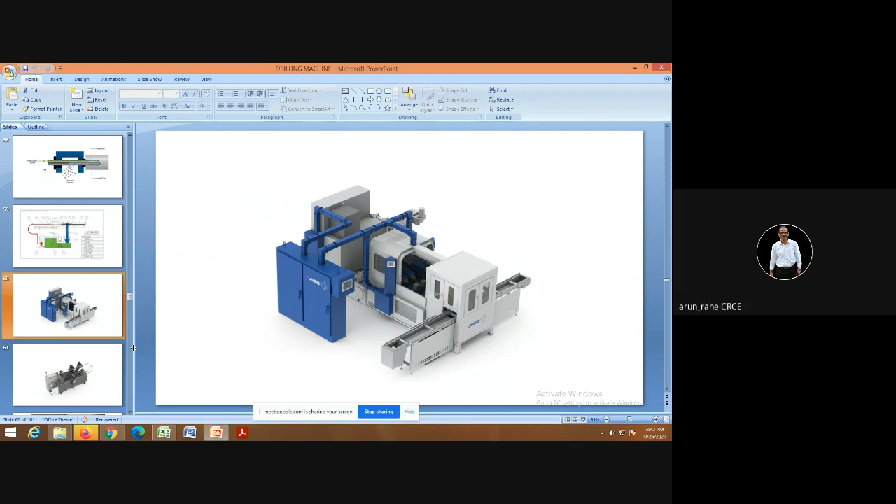So these are the photographs of the deep hole drilling machines. This is how the deep hole drill will look like, which we discussed last time.

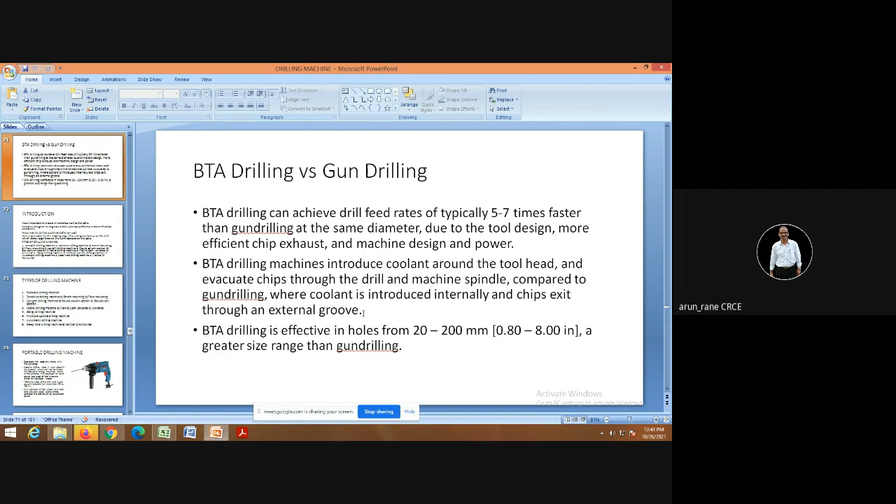BTA is again a deep hole drilling process. There is a difference between BTA drilling and gun drilling. BTA drilling is faster, and BTA drilling has coolant around the tool head. It is effective in holes 20 to 200 millimeters and so on.

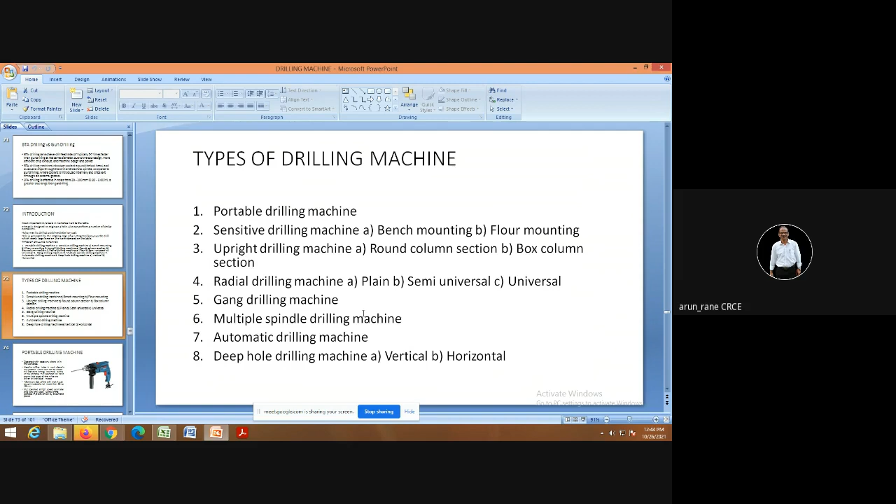So we had stopped here last time. These are the types of the drilling machines: portable drilling machine, sensitive drilling machine, upright drilling machine, etc. Now we'll discuss one by one.

This is the portable drilling machine, which you are already familiar with. Portable drilling machine means it can be carried from one place to other place easily.

So the main concern about this is that it has to be lightweight. The weight should be light because the operator or worker will be using this the whole day, so it should not be laborious.

Now portable drilling machines can be wired, that is it can have electrical supply, or it can be battery operated. Mostly portable drilling machines are battery operated so that it can be carried anywhere and drilling can be done.

Battery operated ones have the limitation that recharging of the battery - once you charge it, it will work for around 3 to 4 hours, so after that you again need to recharge it. Another disadvantage of the portable drilling machine is that it has limitation on drilling - it cannot accommodate more than 12 mm. So basically it is used for smaller holes or smaller sizes.

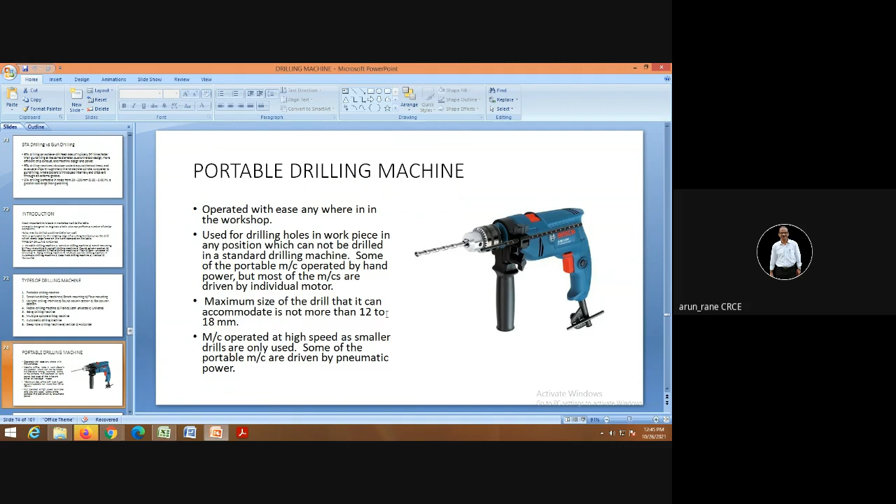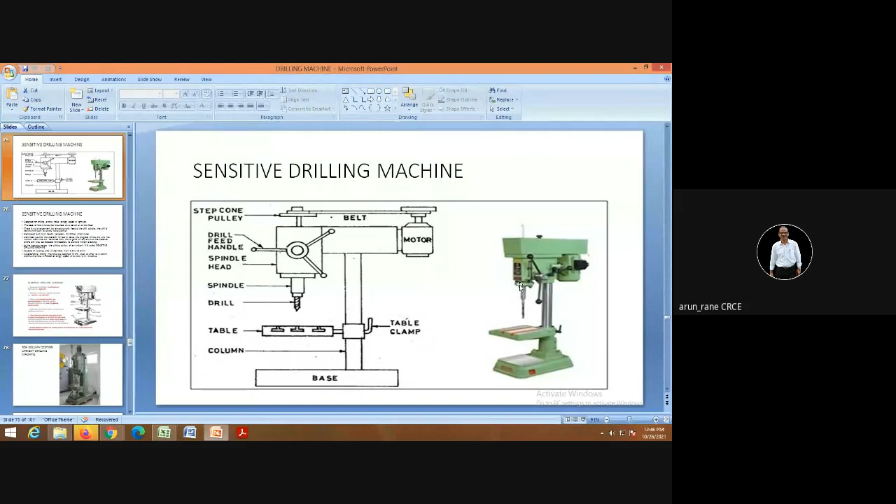This is the sensitive drilling machine. This is an accurate machine, and generally the sensitive drilling machine doesn't have auto feed, so the drilling is done manually.

The features of the sensitive drilling machine are that it can be used for drilling small holes, in lighter jobs, and at higher speeds. So it can drill holes from 1.5 to 15.5 mm. It can even be used for drilling small holes of size 0.35, 0.5 comfortably.

This is how the sensitive drilling machine will look like, and as you can see, it is used for lighter jobs because the weight of the workpiece will be carried on this table, and this table is locked. If the components or workpiece are heavy, then you can loosen this table clamp, take the table away, and the workpiece can be mounted directly on this base. So heavier components can also be accommodated.

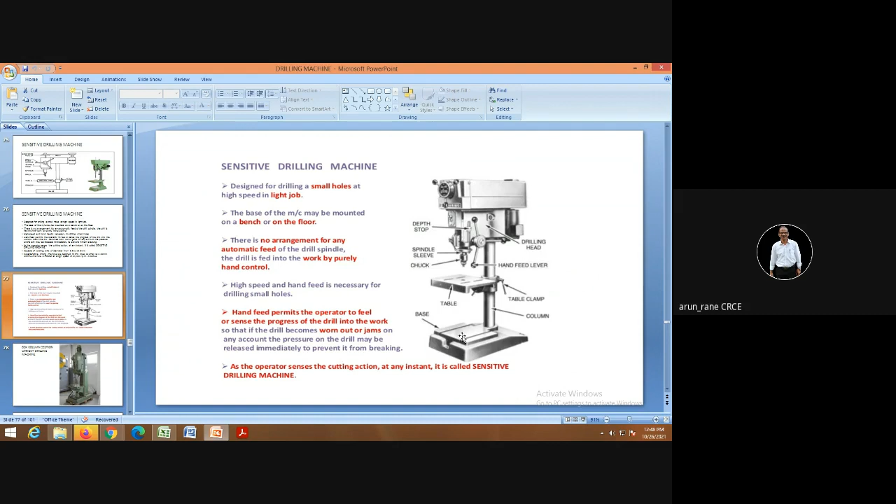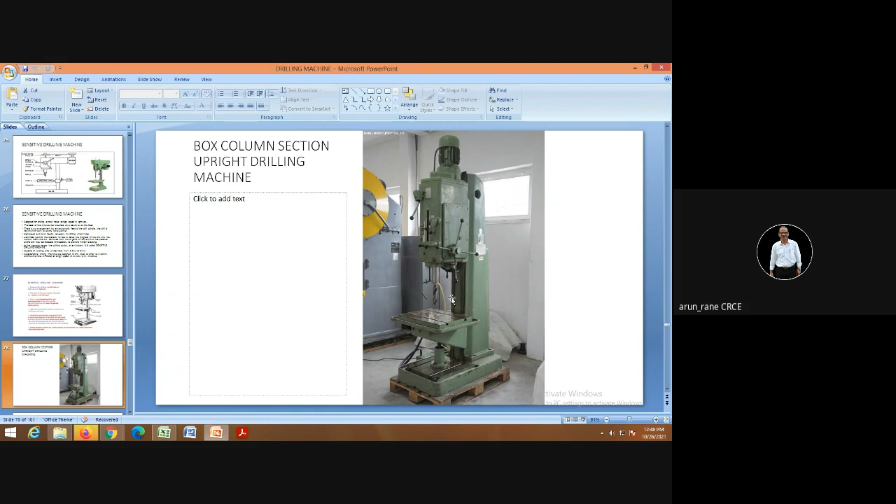This is your box column section, upright drilling machine. The column is like a box - that's why it is called the box column section upright drilling machine. It can be used for drilling up to 2 inch capacity. When I say 2 inch, that means you can drill directly 2 inches in steel, that is in MS. A direct first drill of 2 inch size can be used.

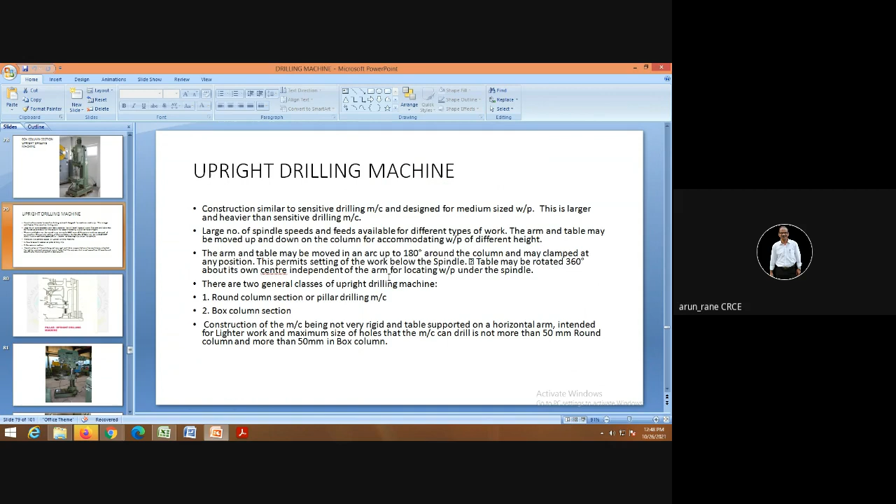And why is it called upright? Because the column is vertical - that's why it is called the upright drilling machine. So the capacity of the upright drilling machine is up to 50 mm. Again, the component or workpiece can be mounted on this table, or on this base.

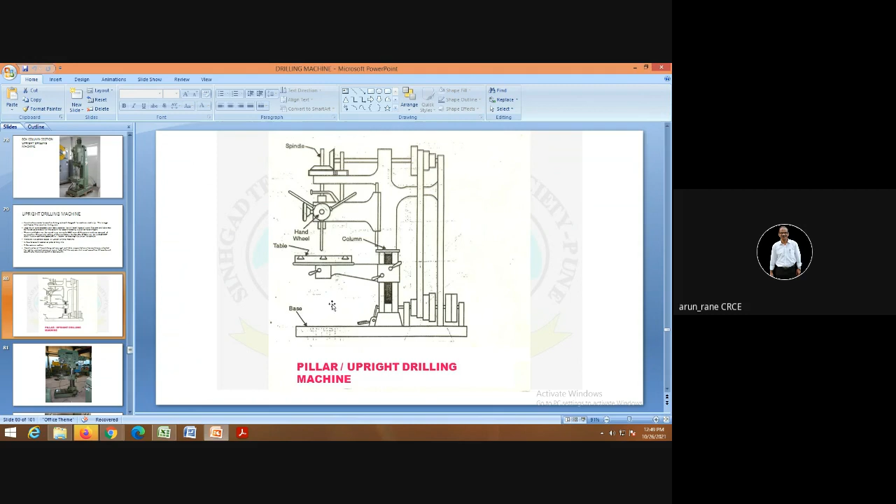This is another photograph of an upright drilling machine. This looks like your column type drilling machine. Again, if the components or workpiece are heavy, they can be directly mounted on this base.

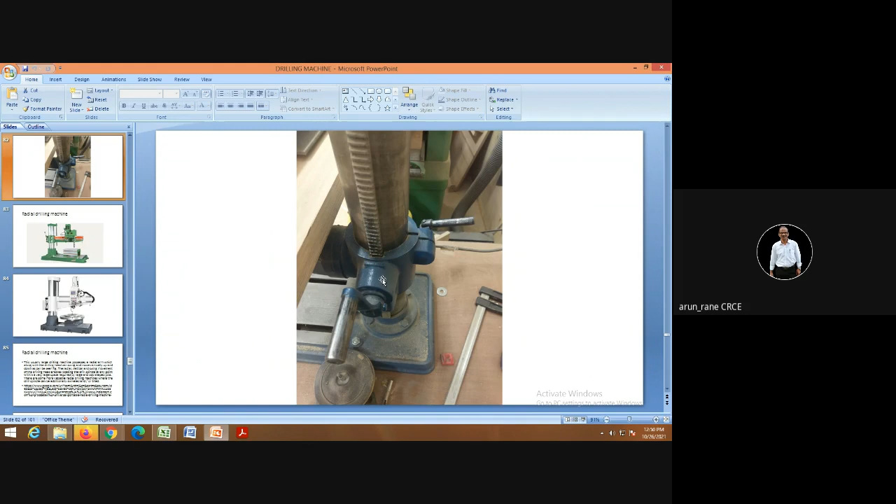This is a lifting arrangement, that is a rack and pinion arrangement. This is called the rack, which is mounted on the column, and the pinion is mounted on this hand wheel. So once you rotate this hand wheel, the pinion will rotate, and the table will move up and down on this rack.

This is a photograph of a radial drilling machine. As I told earlier, radial drilling machines can be used for up to 3 inch drilling directly in mild steel. This is a radial arm, and this is a column on which the radial arm can move up and down. This is the most important machine, and the radial drilling machine is most common in all workshops.

This radial arm can be swung radially, and this drill head can be moved in this direction, and the drill can be moved up and down. So this is one axis, this is another axis, and this radial axis is the third one.

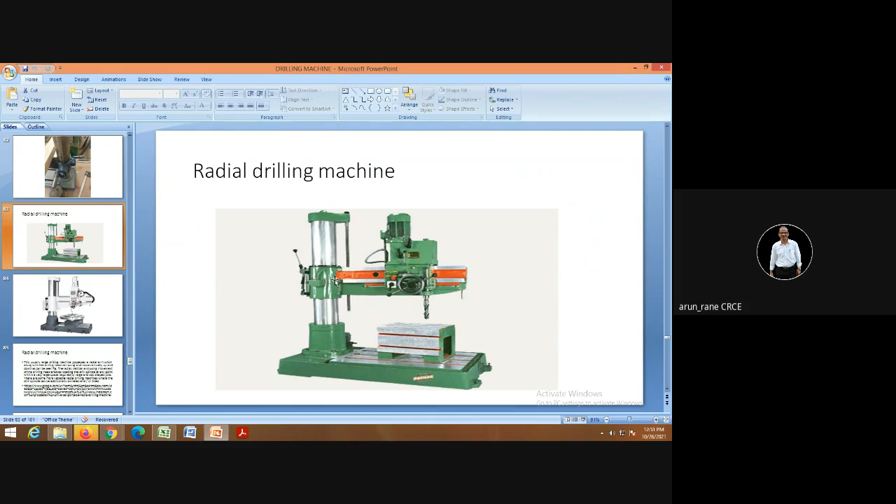This is a circular table. Suppose if you want to drill many holes at definite angles, then this rotary table can be rotated at different angles, and drilling can be done easily. So in that case, you don't have to move this drill head - that's the advantage. You only keep rotating this rotary table.

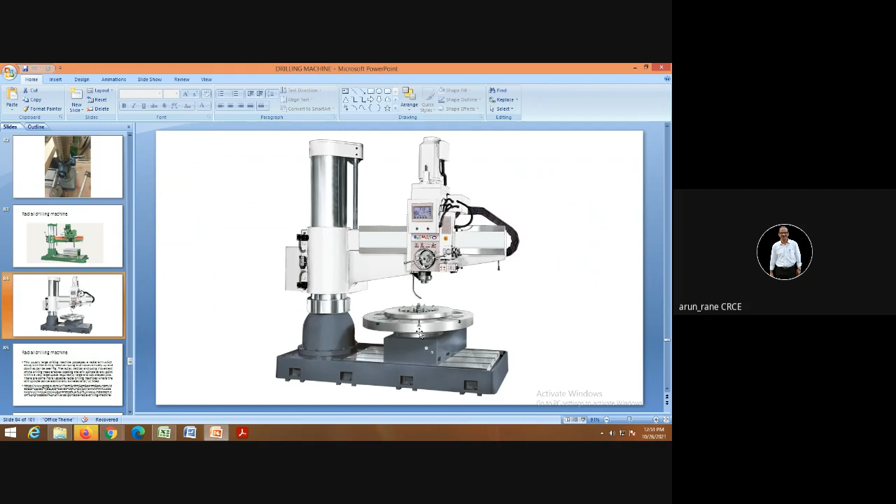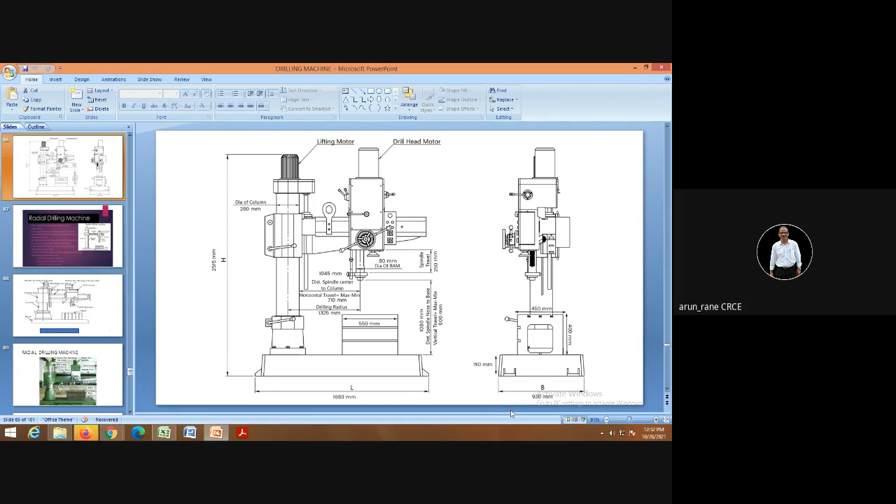All the drilling machines are specified by the size of the hole, or the maximum size of the hole which can be drilled. And of course, there are other specifications like what is the maximum size of the workpiece it can accommodate, how much is this drilling radius, what is the height, what is the weight, what is the HP of the motor, and so on. But the most important specification is the size of the drill that it can drill in millimetres.

Up and down movement of this radial arm can be motorized. Motorized means auto, because radial drilling machines are heavy duty machines, and manually, if you try to lift this radial arm, then it will be very laborious. So the lifting, that is up and down movement of the radial arm, is always motorized.

This is the sketch which you can draw for the examination. Like, this is the elevating screw, this is the guide ways, this is the drill head, this is called a quill. This is a table which is directly mounted on the base. Now the table is designed in such a way that a component can be mounted from all the four sides as well as from the top. So these T slots are provided not only on the top, but also on the sides.

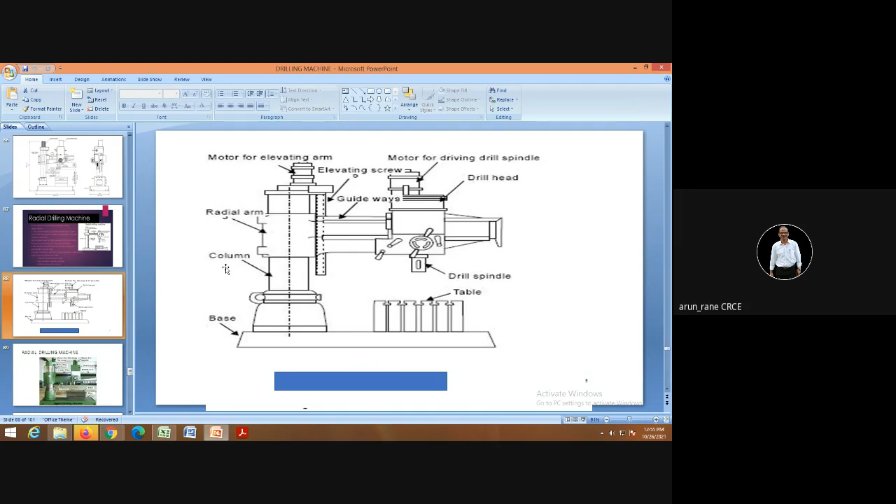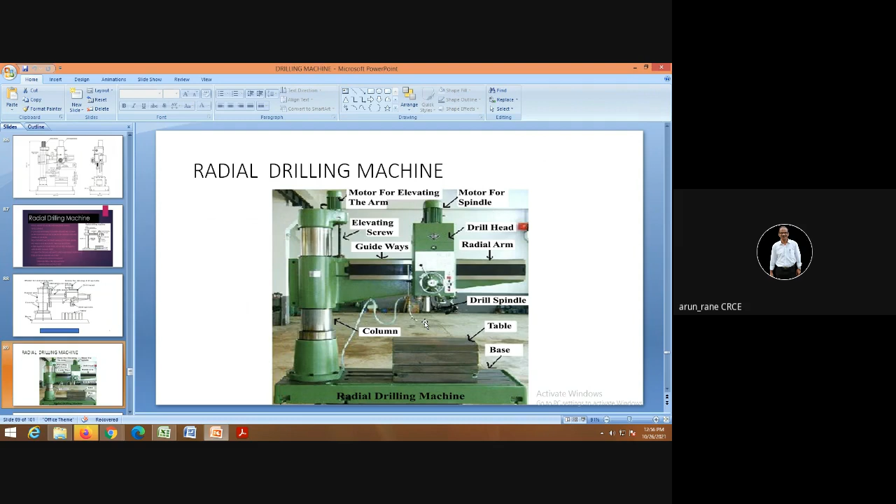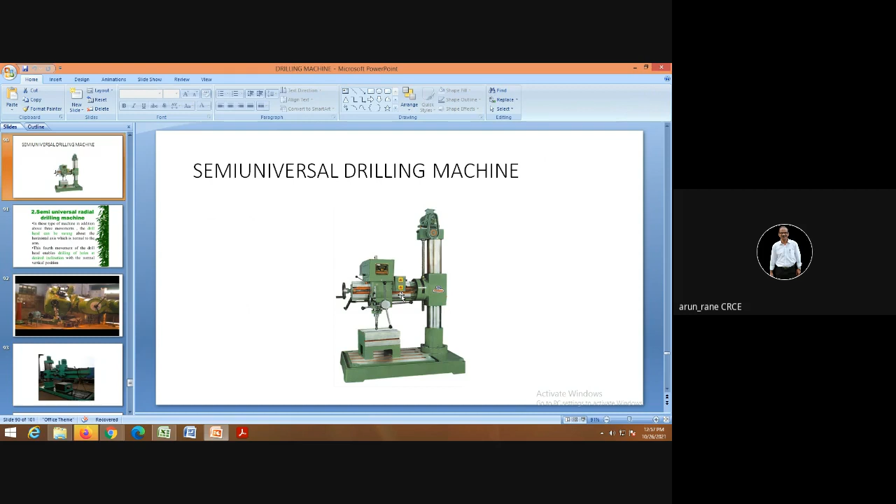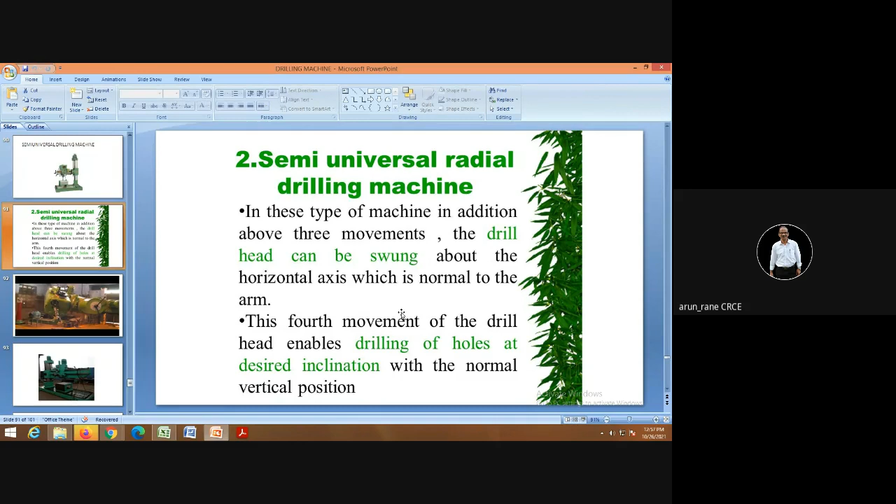This is a bigger size radial drilling machine of 3-inch capacity, and in the photograph it is shown how to lift the drilling machine. So this rope is used for lifting the drilling machine.

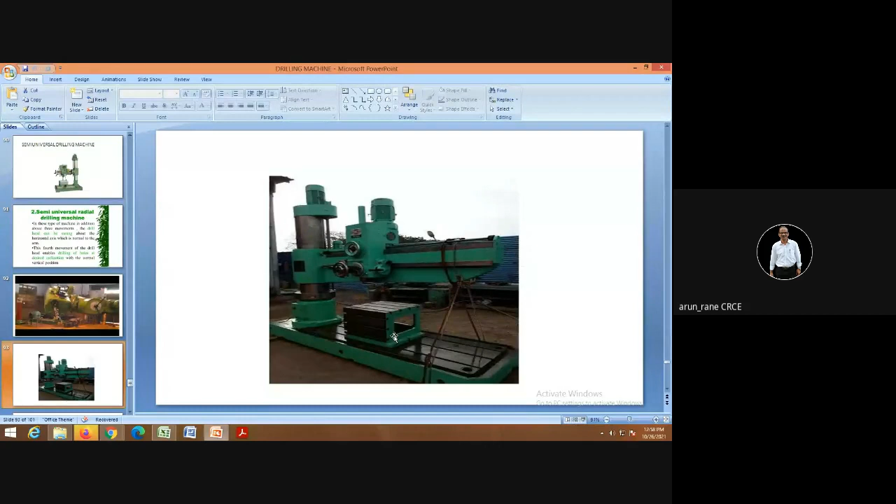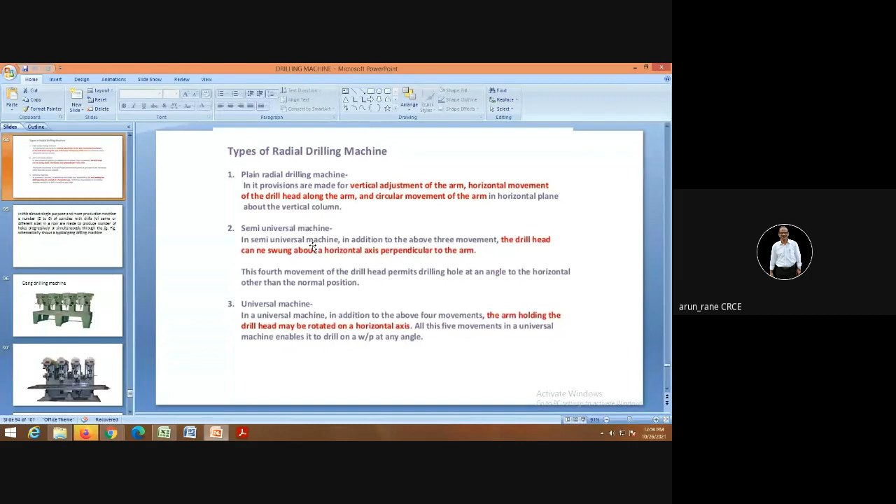Again, in radial drilling machines there are various types, that is plain radial drilling machine, semi-universal machine and universal machine. So as I said, in the universal machine the arm can be swung in two planes. In semi-universal the arm can be swung only in one plane. Whereas in the plain radial drilling machine the radial arm cannot be swivelled.

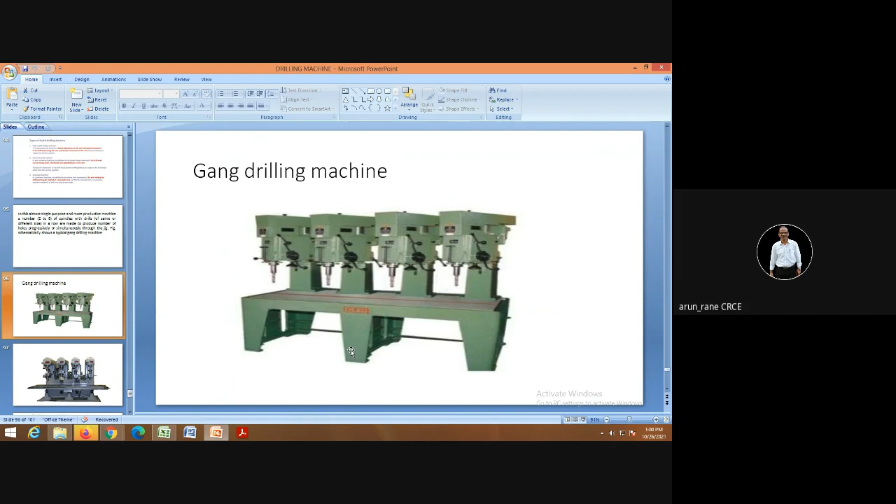This is for the gang drilling machine. Gang means there is more than one person. So similarly, in case of the gang drilling machine, the number of drills is more than one. So that's why it is called the gang drilling machine. So here, one, two, three, four. So four drills are taking place simultaneously. That's why it is called the gang drilling machine. This is another type of gang drilling machine. So obviously, this is used for mass production.

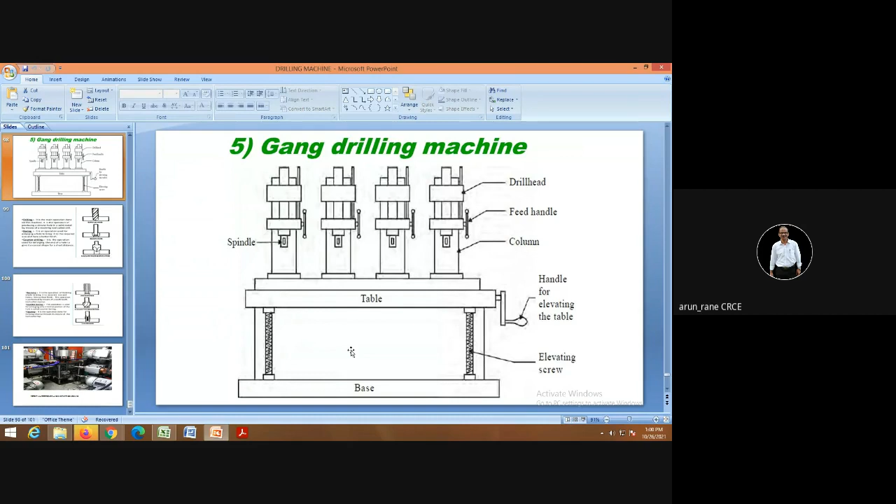On the drilling machine, you can do drilling, you can do boring, you can do countersinking. All this I have already shown. Reaming is nothing but finishing the drilled hole, because in case of drilling, you don't get proper finish and size. So if you want accuracy, good finish, and precise size, then you have to go for reaming. Standard reamers are available, and reaming will always give you the size in H7 tolerance.

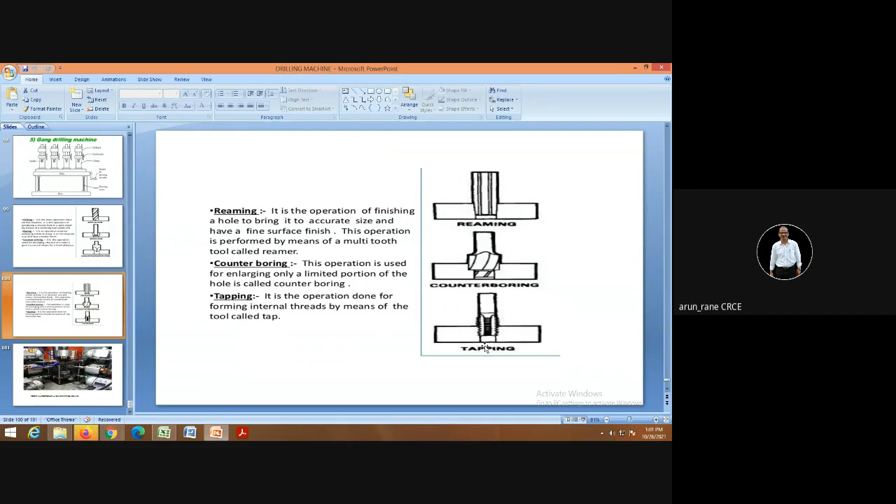This is the counter boring operation. And this is what tapping is. This is the rotary multi-station drilling and tapping machine, purely an SPM, special purpose machine, used for a particular component only. In these machines, look, drilling can be done on the periphery, and there are so many drilling spindles, one, two, three, four. This comes under the category of special purpose machine.

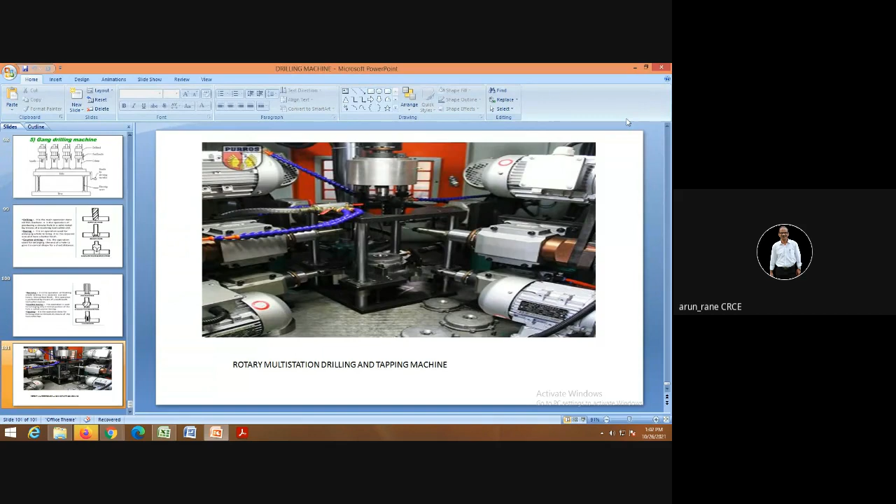So from the examination point of view, for drilling machines: what are the different operations that can be performed on a drilling machine, what are the types of drilling machine, and what are the important specifications of the drilling machine. These are the questions which are important.

Any doubt? Raghav, are you there? Hello, Mr. Raghav. No doubt, sir. Okay. If you have any doubt, please feel free to ask.

These images I have already shown. Videos also I have shown. So we are done with the lathe, we are done with the drilling operations. These MP notes also I have told you. Now drilling is followed by boring. So first I will show you the images, how the boring machine looks.

The most important thing is boring is nothing but enlarging the hole. Suppose you want a hole size of, say, 36.78; you will not have a standard 36.78 drill available. That is the first thing. Second, even if you make this drill, you will not get good finish or accuracy, because on a drilling machine the drilled hole will always be rough, and not only rough, you will not get the correct size of 36.78. It will always be oversized, 36.9.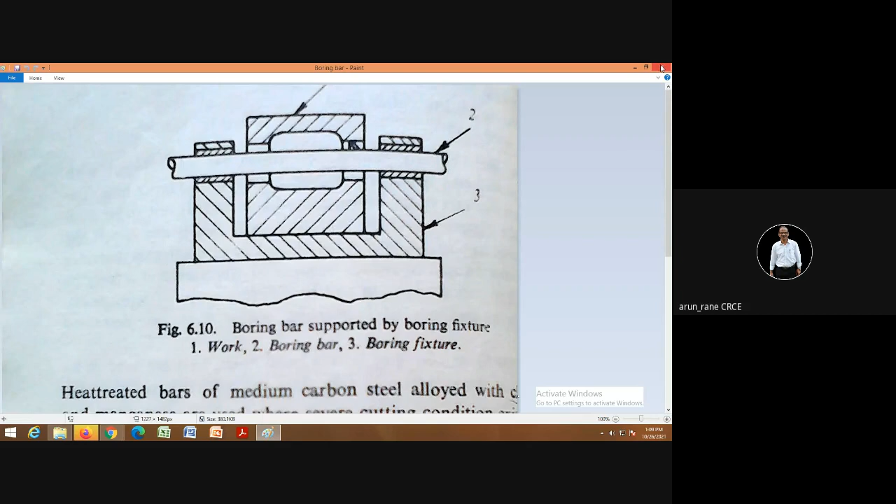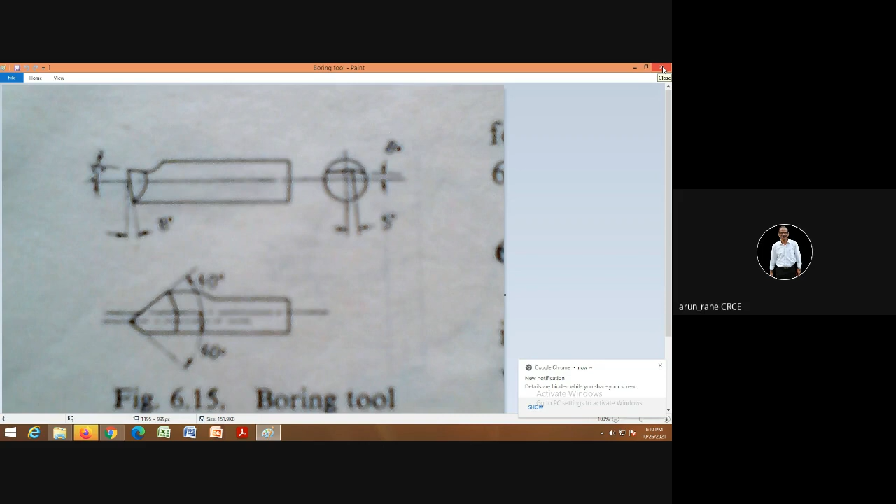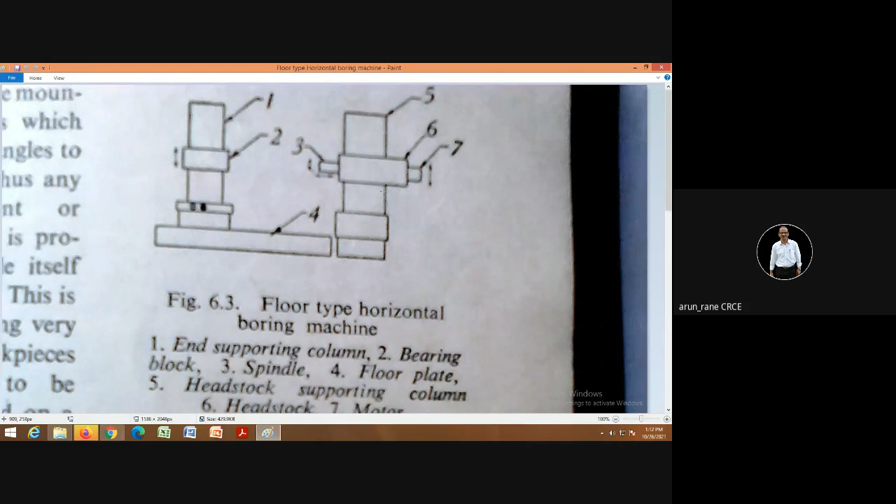As the workpiece can be mounted on the floor, this machine is meant only for heavy workpieces, big housings, rubber mixing mills, sugar mills, dyeing plants. There they have big housings, so those big housings can be directly kept on the floor. This is again a sketch of the horizontal boring machine, which you can see carefully, and this can be reproduced in the examination.

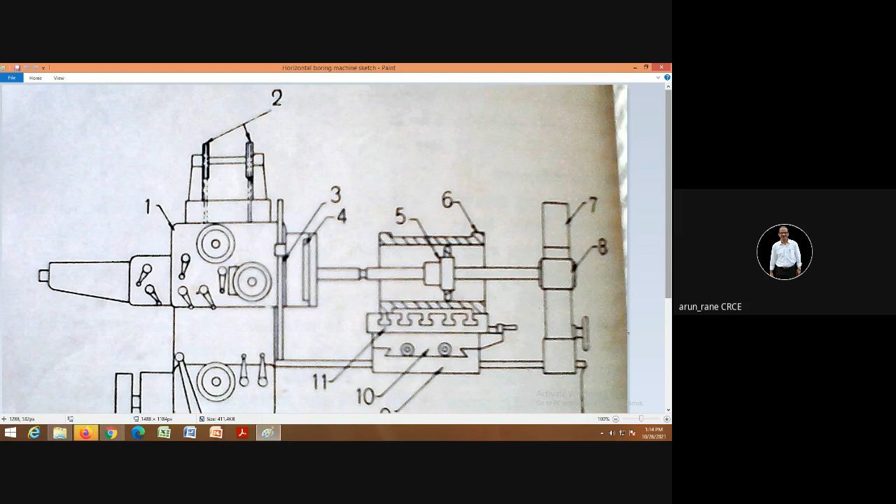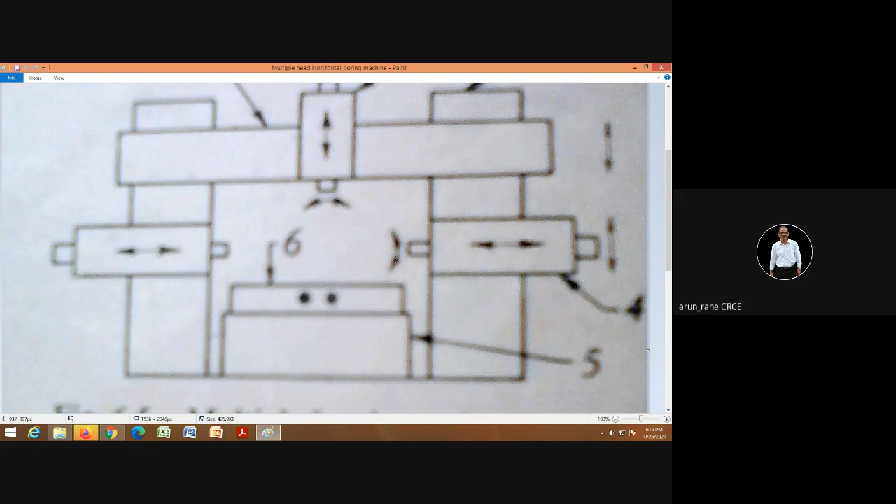This is your multiple head boring machine. That is, you have one head here, so it can do boring in this direction. You have another head, it can do boring in this direction. That is, from this as well as from this. So that's why it is called the multiple head boring machine.

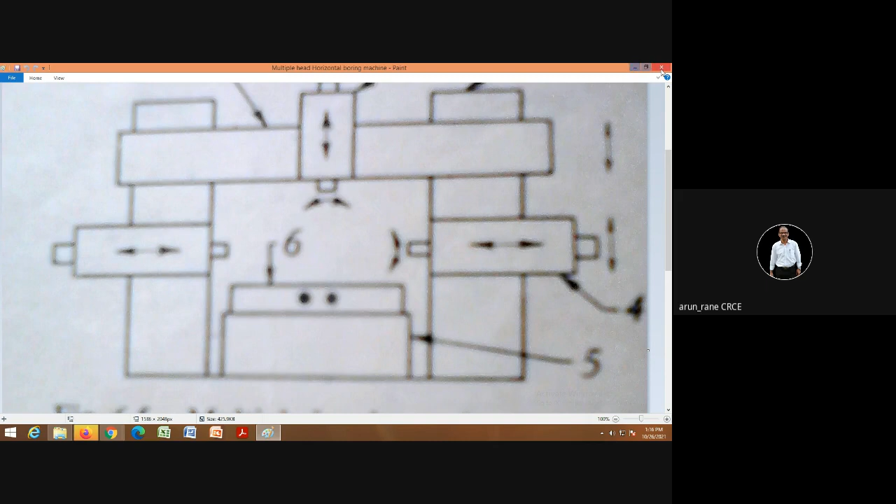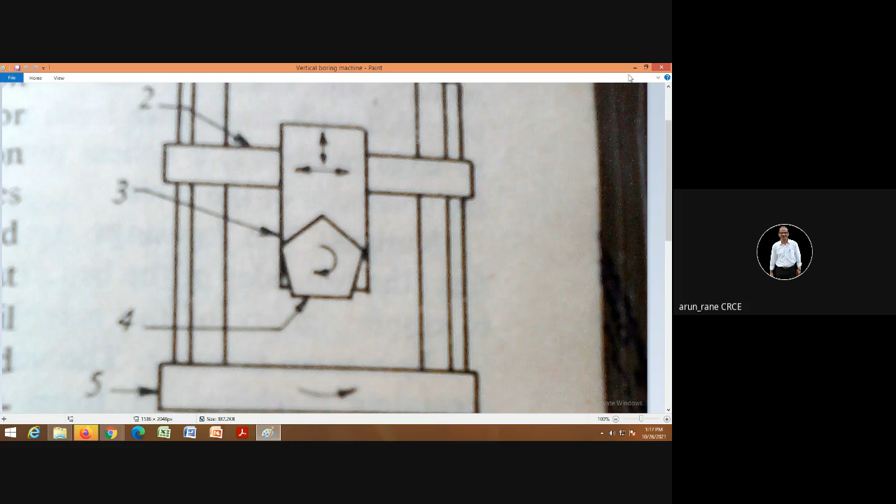So you can do boring up to 5 sizes, or you can do drilling, tapping, or boring. So you can have a drill on one face, a boring bar on another face, a tap on the third face, a reamer on the fourth face, and so on. So the name of this machine is vertical boring machine, or it is also called the vertical turret lathe. So these were some images.

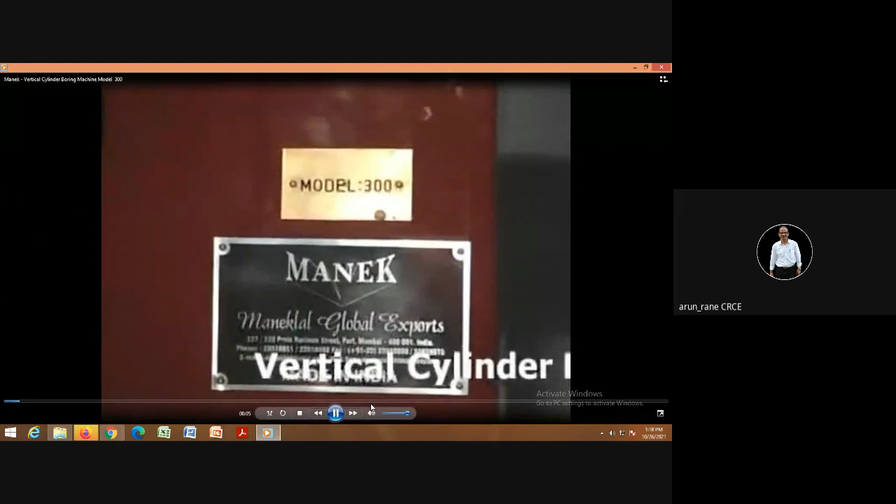I'll show you in short. Let me see whether this video can be played or not. This is your vertical cylinder boring machine. This is the engine, and this is a cylinder. This is a motor.

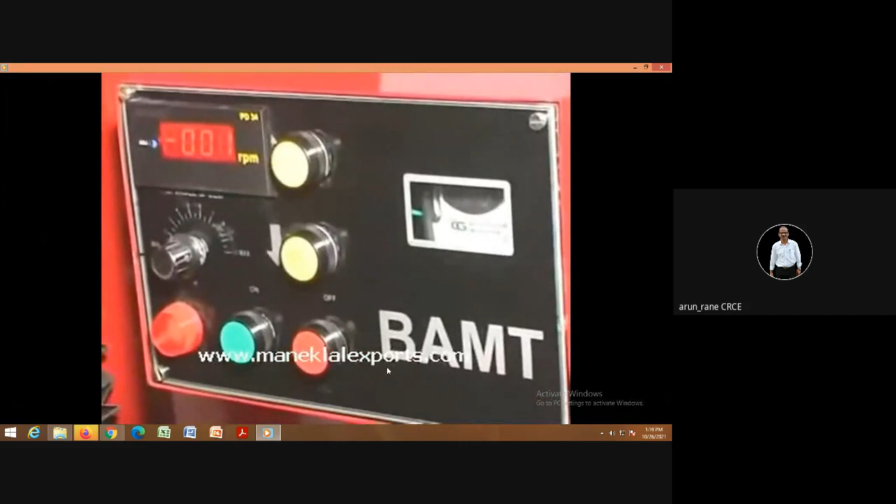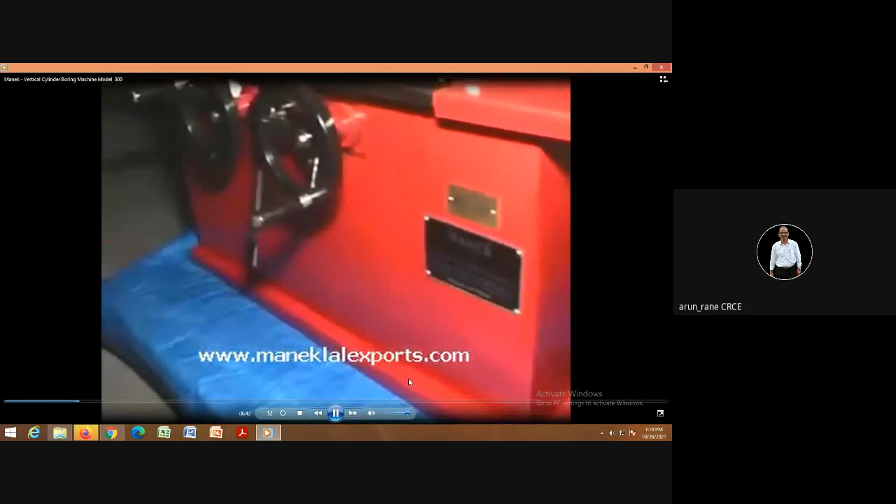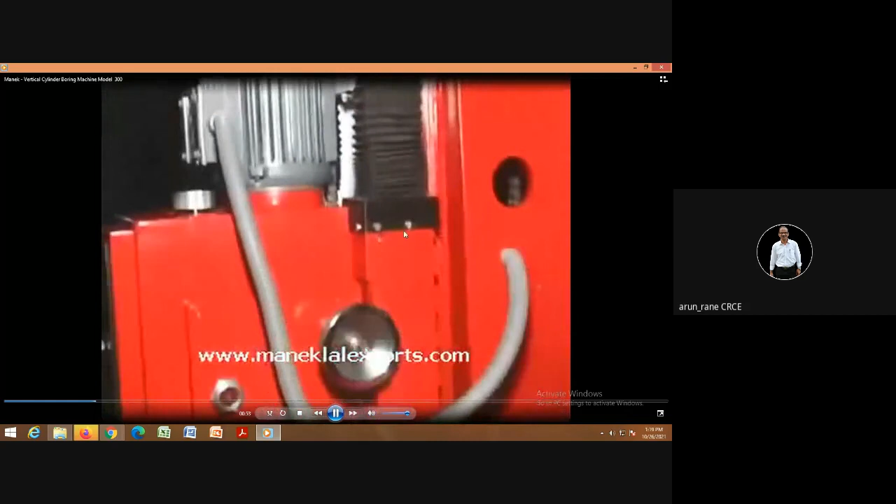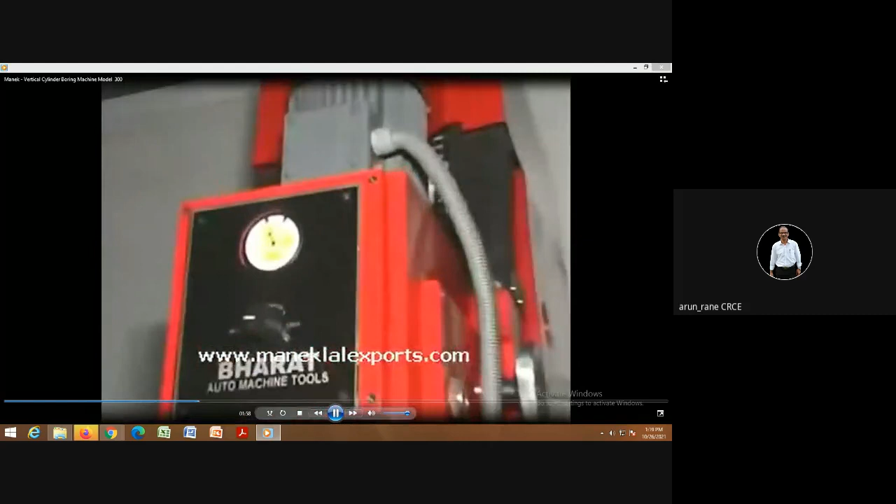Bharat is again a reputed brand. These are the bellows. This is the spindle to which this boring tool is attached, and this is how your boring takes place. First, you have to do the settings. In settings, you have to bring this boring tool exactly to the center of this hole. Then you have to lock the X and Y axes, and boring can be done only in the Z axis.

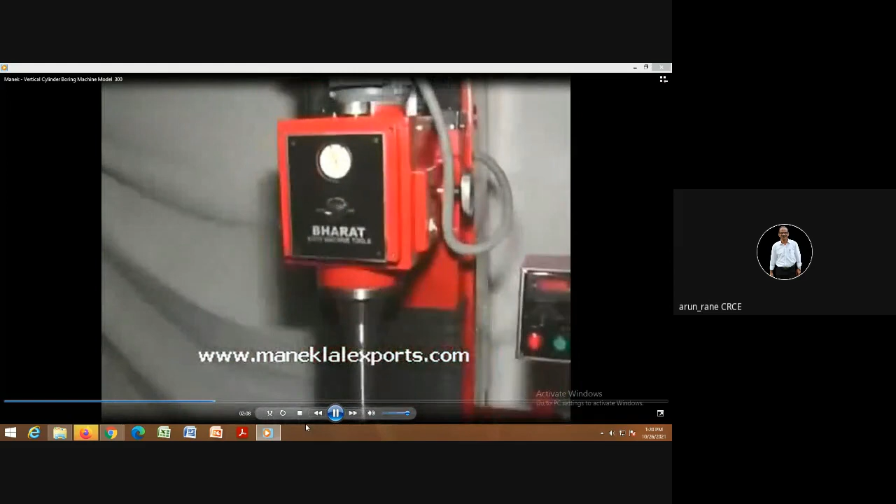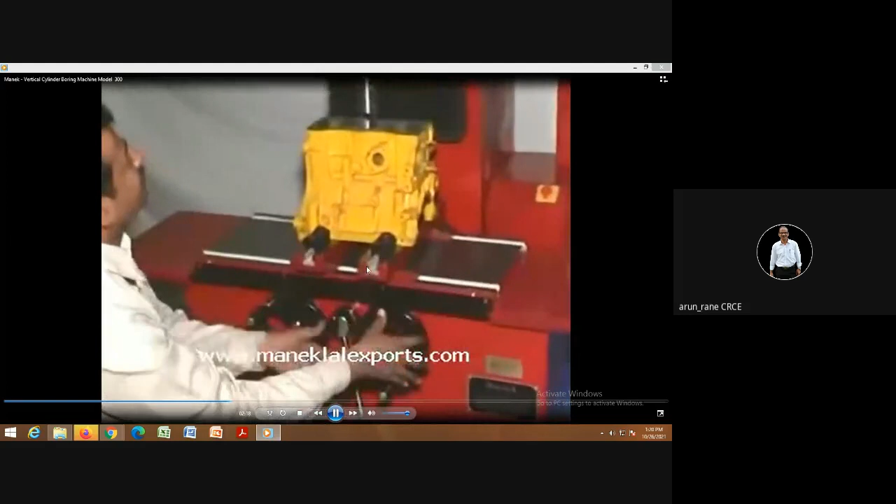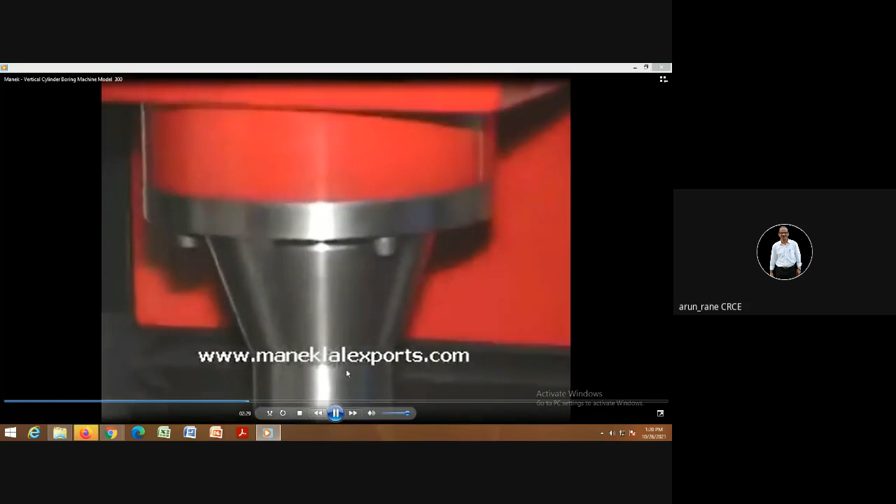This dial is showing the size of the hole which is being bored, and the feed is given to this boring tool, that is, in the Z axis. So see, this is the X axis, this is the Y axis. He is now doing the setting, that is, he is bringing the boring tool exactly to the center. See, now it is not moving, that means the boring tool is exactly in the center of the hole.

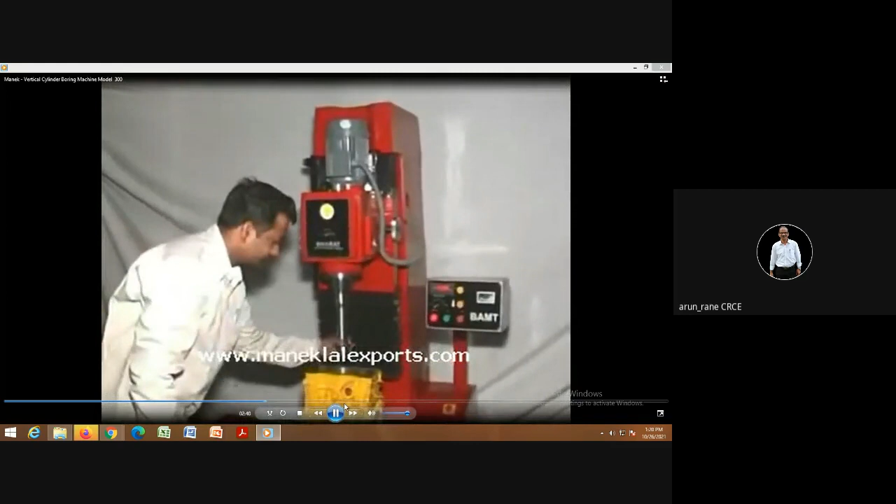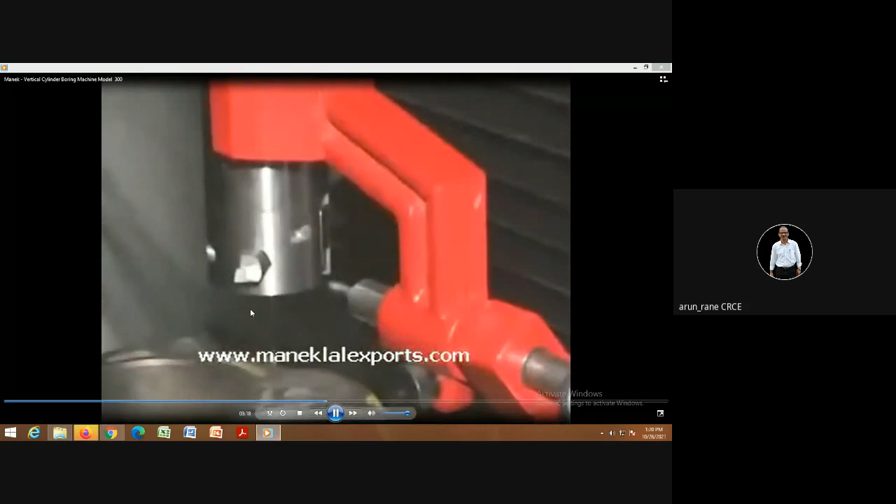Now he is setting the size of the hole, that is, he will bring this tool which is attached to this boring bar to the size of the hole that is to be bored. So as per that, he will set the tool. So this is the boring tool, this is the boring bar, and this is the dial.

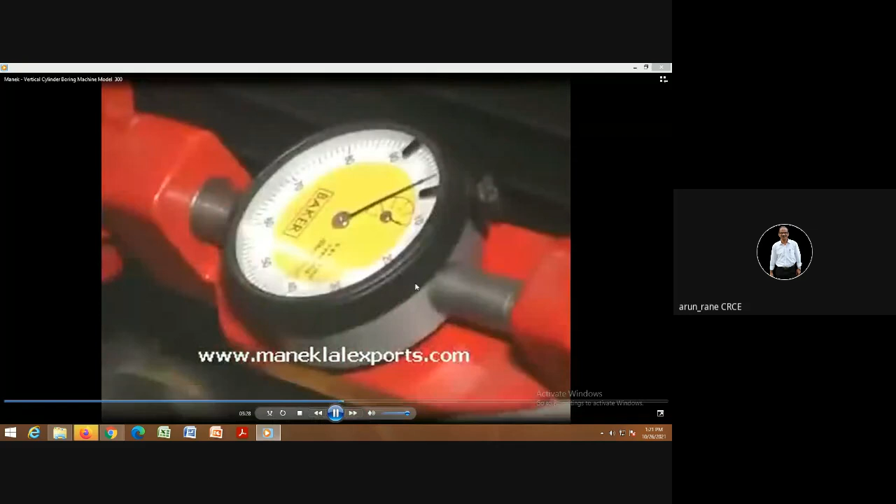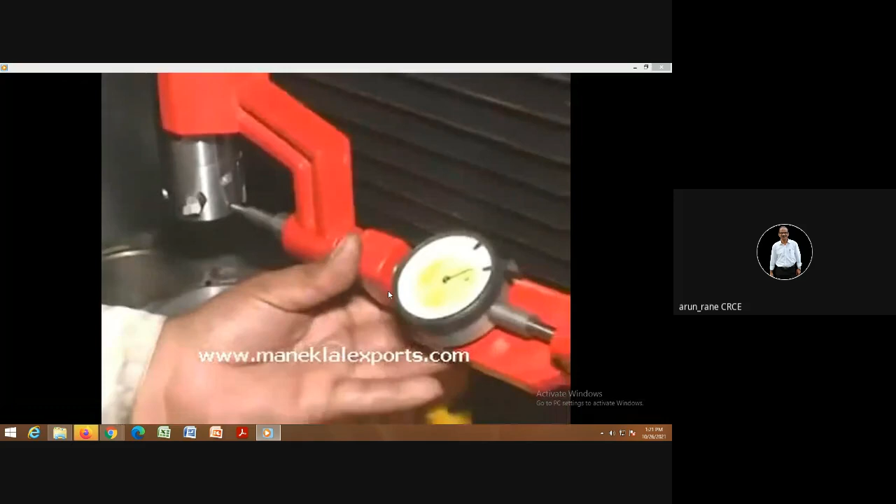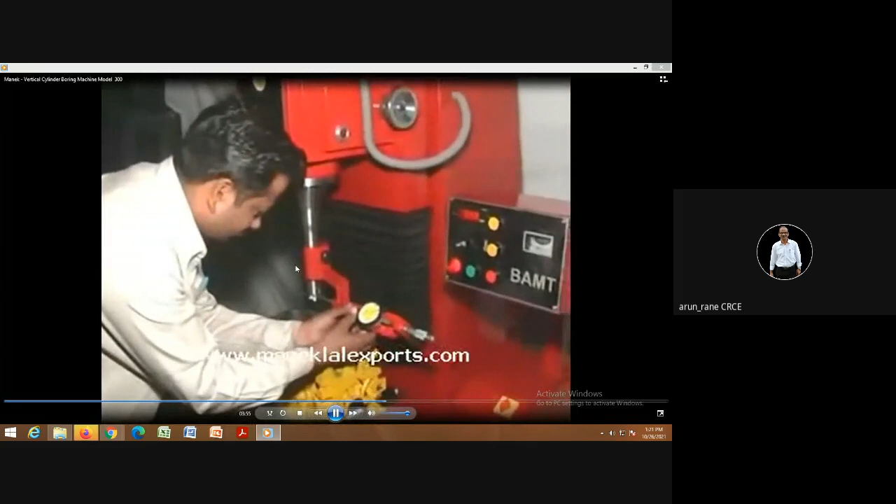Suppose I want to set a 50 dia bore, so 50.00 will be shown at 0. Anything less than 0 or more than 0 will indicate the size. If the tool is set at 0, that means the size of the bore will be 50.00. If it is on the left hand side or the right hand side, that means the size is not correct. And this is what he is doing.

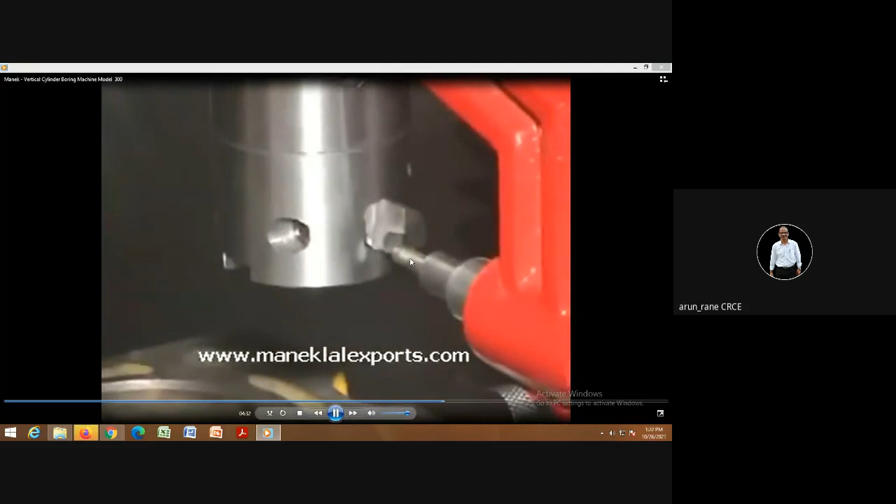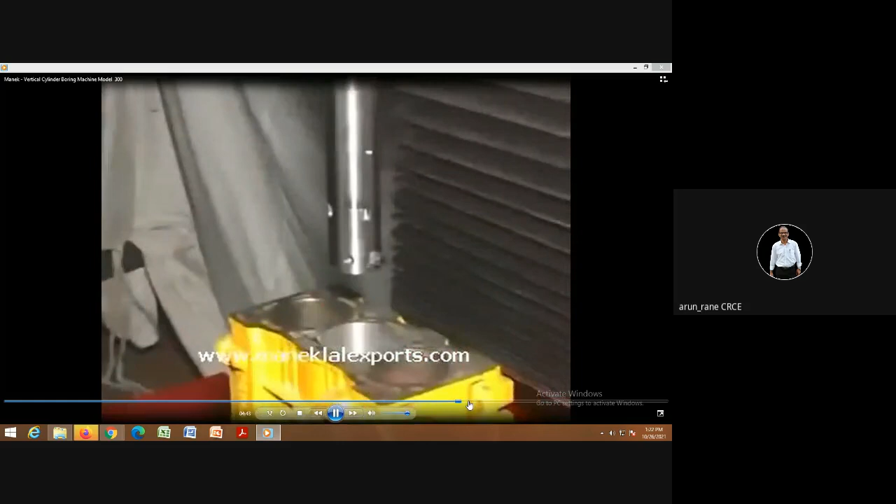See, now he will move this boring bar. See, now he has moved this boring bar. The tip of the boring tool is touched to this dial indicator. That means the correct size of the bore has been set. Now you are ready to cut.

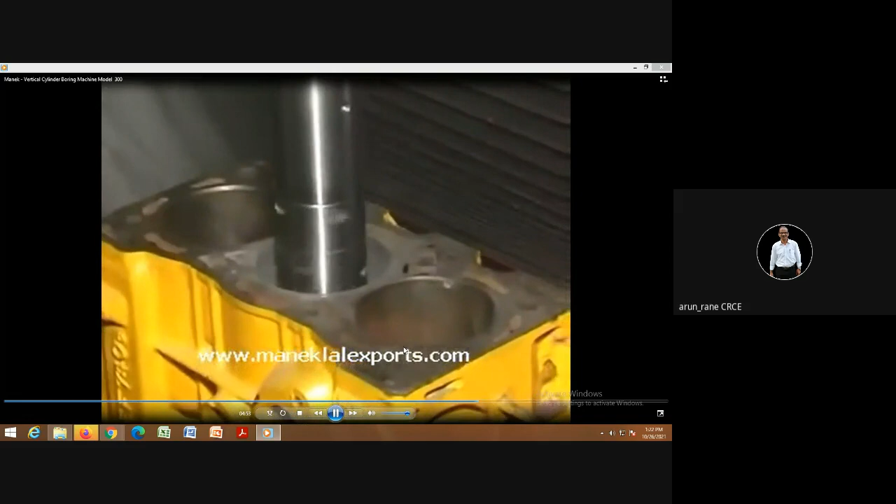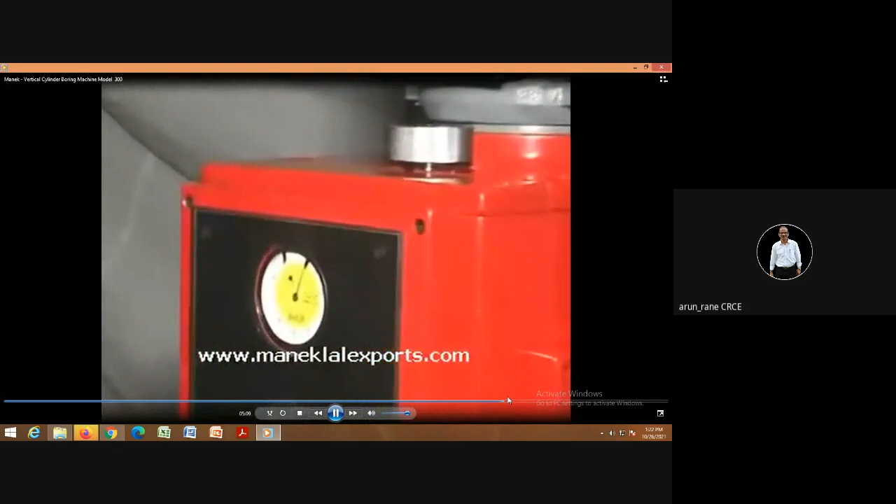So in setup, the first step is you have to align the center of this boring bar with the center of this hole, and then second, you have to set the size properly. That is step 2. Then you have to give the feed in the vertical direction. Any vibrations will be shown on that dial indicator. This material is cast iron. Normally the cylinder blocks are all made of cast iron only.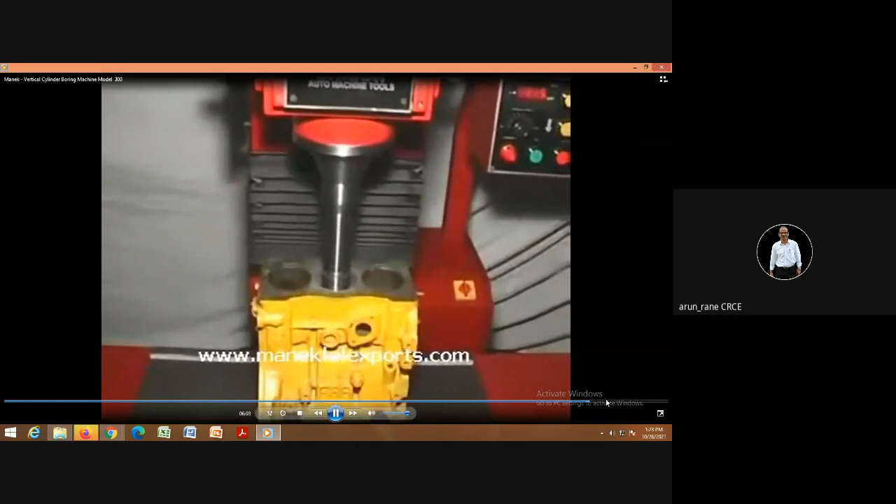Hello? Yeah, somebody is asking. Anybody is asking? No. Anybody has a doubt?

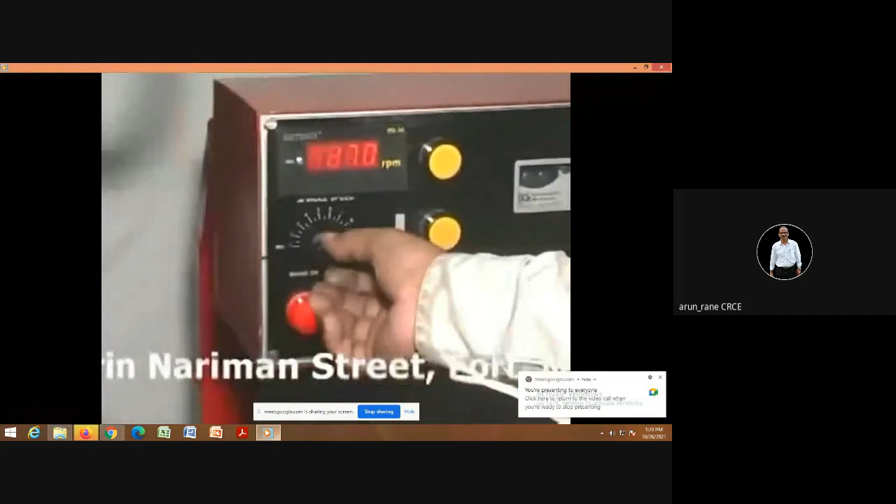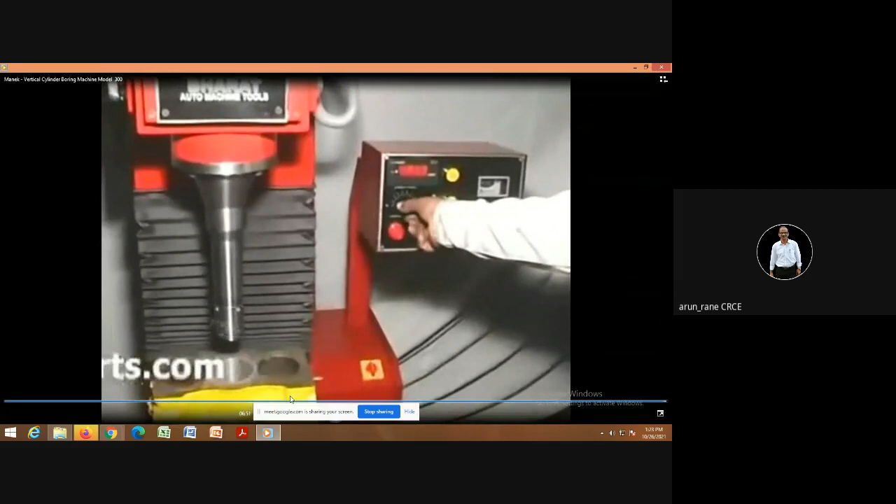Now the boring is done. The boring bar has been lifted up. So this was the operation of your boring machine. The weightage for this boring machine is maximum 4 marks, 2 to 4 marks.

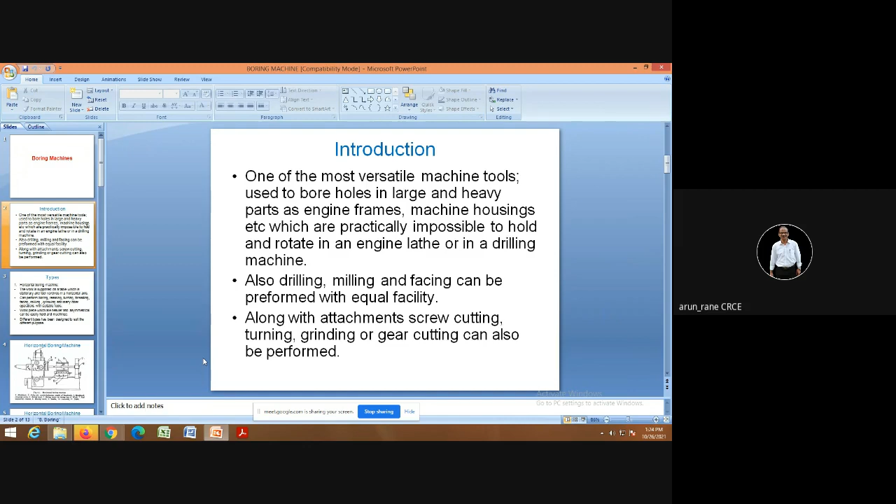No doubt you can do drilling, milling and facing on this boring machine, but typically a boring machine is used only for the boring operation. And boring machines are of two types: horizontal boring machine and vertical boring machine.

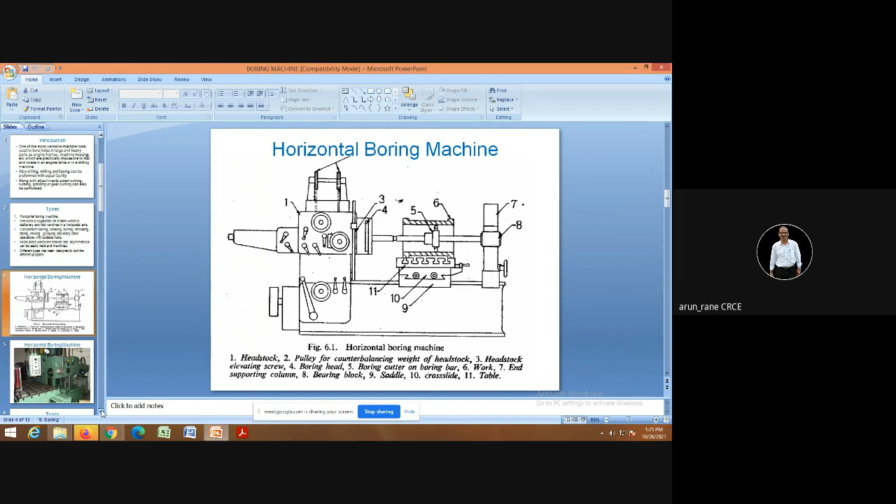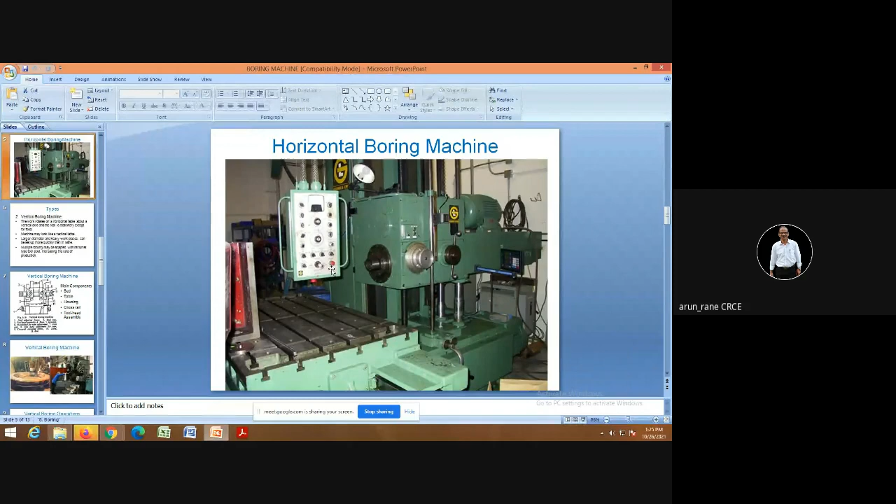This is a photograph of a horizontal boring machine. Here the boring bar is mounted, which goes through the workpiece. This is of course a table on which your workpiece is mounted.

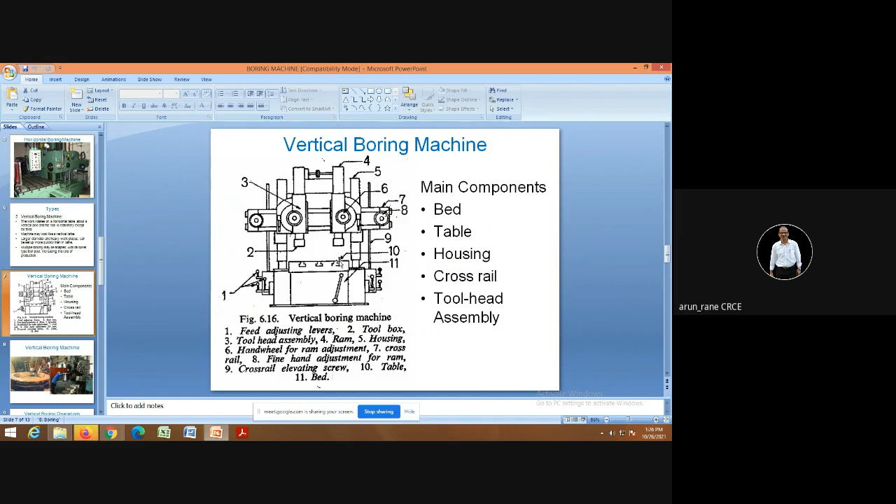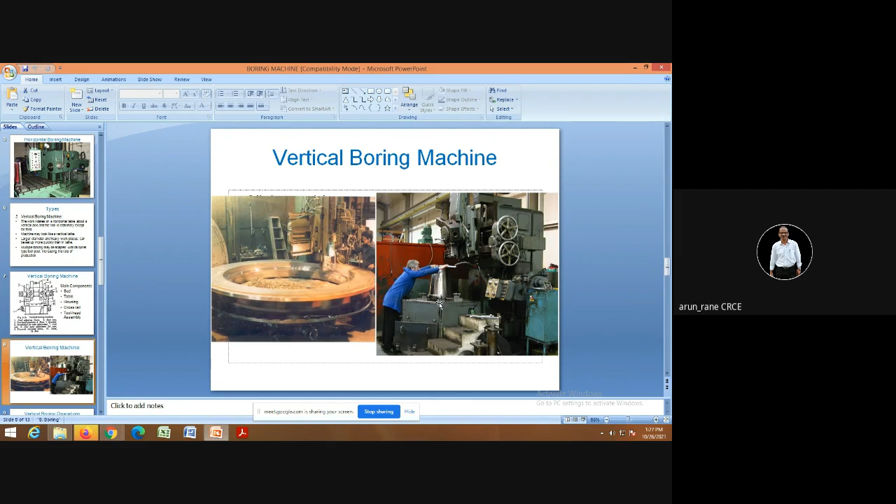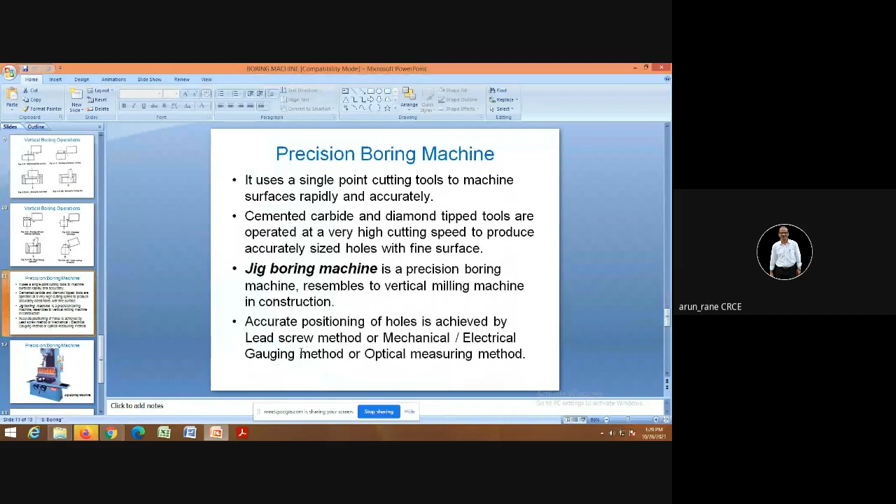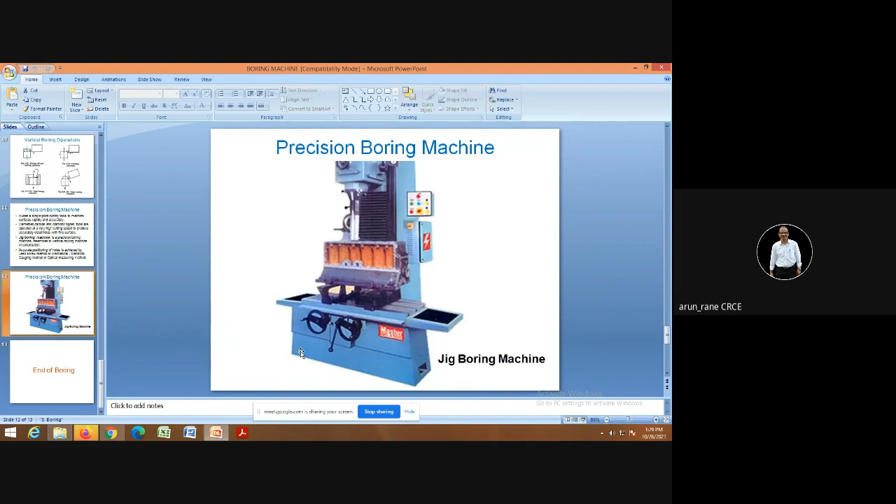Precision boring machines are called jig boring machines. Jig boring machines are used where the precision is more, that is, the center distance between the two holes is precise. Then you go for precision boring. As well as when the size of the bore is important, you go for the precision boring machine. And remember, the precision boring machine is called the jig boring machine.

So the difference between a jig boring machine and a normal vertical boring machine is that jig boring machines are only meant for doing boring operations. The construction of jig boring machines is done with a very high degree of discipline. The bearings which are used are very high quality. The beds are of high quality. And vertical boring machines can be used for other purposes like cutting off and necking, forming operations, taper turning, taper boring, etc.

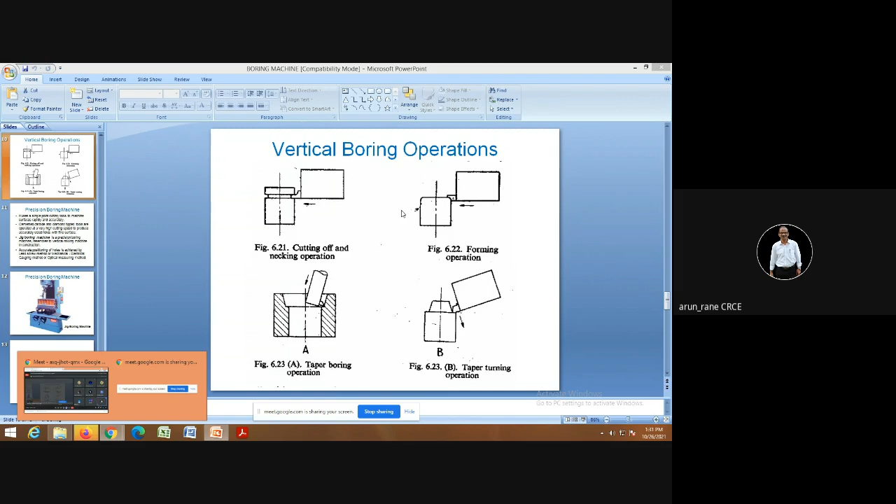Okay, so since the weightage of this boring is only 2 to 4 marks maximum, a question which can be asked is again: what are the different operations that can be performed on boring machines? How do you specify boring machines? The important specifications are the maximum size that can be bored, and the drives, that is X, Y, and Z. Those are the two important specifications of boring machines. Specifications can be asked for 2 marks. Different operations means 3 to 4 marks.